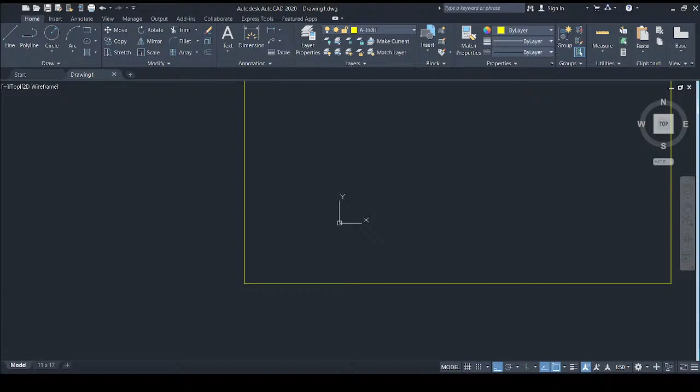As you know, tomorrow the exam will be about 2 hours and something minutes. Whatever, it's probably more than enough time. So if you're a fast person, you'd be able to complete the drawing, and all you have to do once you've completed is basically go through now and spend a bit more time to make your work a bit neater.

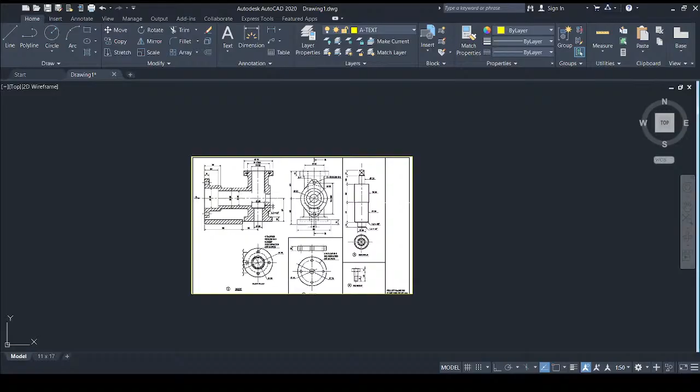So typically they'll ask you to do an end view and a sectional, or they might ask you to do a plan view and a sectional, an assembly. Typically you'll find things laid out like how it is here, where you will have an end view. In this case, this is an end view and this is a sectional view. Here is somewhat of a plan view of the body itself.

Now this plan view is actually showing you what it looks like up here. I hope you can all see my cursor. So that's what that is showing. All the parts will be numbered and labeled. They'll also tell you where the parts should go, to make things a bit easier for you.

So it gets no easier than being a mechanical person doing TD, because you're not trying to figure out anything. All you're doing is reproducing what they give to you and assembling it according to how they say it should go or where it should go.

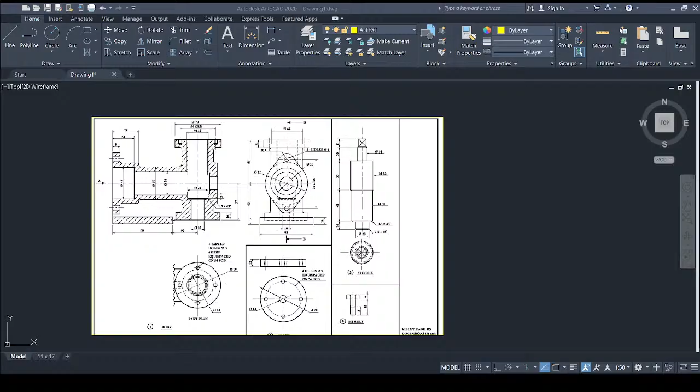So for example, you'll find them telling you exactly - they might say, draw a full size either in first angle or third angle orthographic projection. First and third angle orthographic projection is just a fancy word for how the drawing is organized, for those of you who might not know.

What I'm saying is it's going to tell you first angle or third angle, which one you should be doing. As I said before, first and third angle is just a fancy word for describing how you organize the drawing. So for example, for first angle, all it means is the plan is going to be at the bottom, and then you're going to have the direct elevation or front view at the top, and then you'll have the end view to the side of the elevation. If you're mechanical, you know what I'm talking about.

Nothing major there. As I said before, it gets no easier than being a mechanical student, because the worst case scenario is that you draw all of this and you're unable to assemble it, or you have not assembled it perfectly. You'll still get your marks.

Building person, things are a bit more complicated for you guys, where there are so many variations of things that they could give you. While the mechanical person will know that they're doing a plan view and a sectional view, building persons, you really can't know what they're going to give to you.

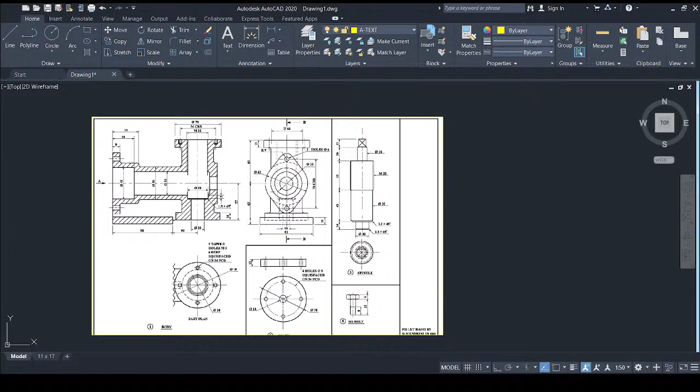Chat is going crazy. All right, so what I'm going to do is a quick layout on my screen for you guys, and I'm going to be doing a quick sectional view of it, a quick foundation plan of it, and just about everything, to give you an insight on how you'll tackle these things.

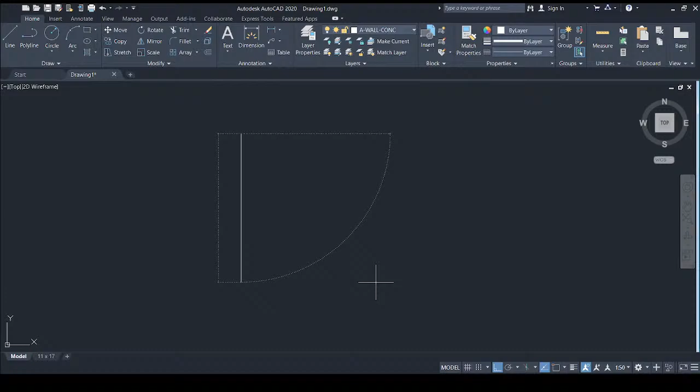So let me go here, A-WALL-CONC. Now I know somebody asked, I think yesterday or this morning, but I was so busy, how do I draw two lines all at the same time? Because some of you, if you're not using AutoCAD architecture, you'll probably draw a wall by simply drawing a line, and then offset it by a certain amount, say 150 or 100 or whatever it may be. This is what you'll do, which takes up a lot of time. But what if you could draw two lines all at once?

Now there's a way to do this, and there's a tool that is called the multi-line tool. Now depending on the version of AutoCAD that you're using, things might vary.

And yes, I'm touching on site plan as well. I'm going to be touching on how you draw the boundaries, and how you draw lines at specific angles and all that stuff. So let's get into things, there are so many things to do. This needed a few sessions. So let's go.

So to draw two lines simultaneously, or to draw two parallel lines at the same time, the tool or command that you use is multi-line.

So whether you want to pull it or find it somewhere up here, I always encourage persons to know the shortcuts. They are your best friend. The shortcuts for AutoCAD are quick access. So even if in the exam all of this up here disappears, you'll still be able to do your work, because you know your commands.

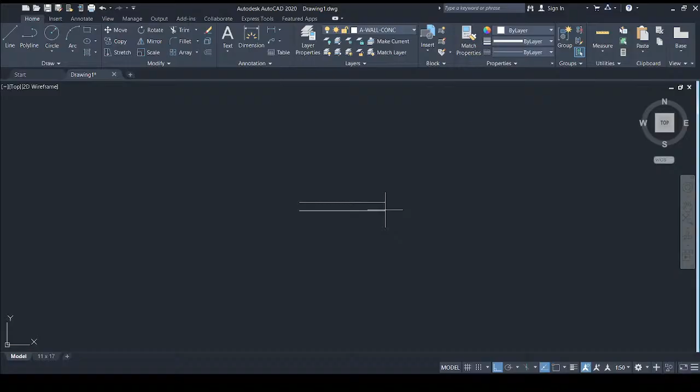So for example here, I'm going to do a quick house, if you want to call it that. As you can see, I'm easily drawing my walls without any issues or problems. I'm simply drawing the walls, but you'll notice the edges of the building changing. So you decide how you want to do your thing.

So I have a little room there and one there. Now you can fillet these as well, or whatever you want to call them. The functions are similar, but you can't use this fillet tool here to fillet the corners, because this here is like a total entity.

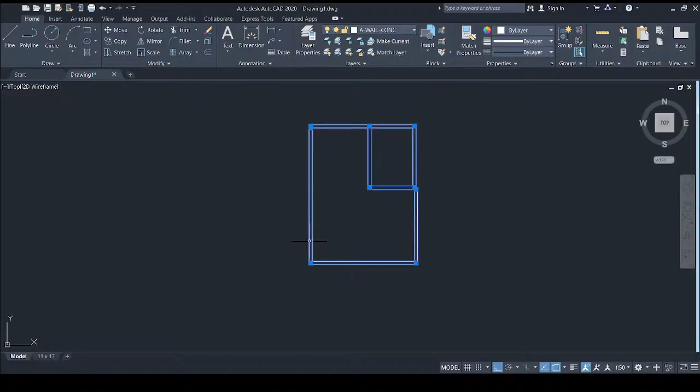This is like a polyline. So if you're going to use this fillet tool to fillet the corners, you'll have to explode these lines. You simply click on them and explode it. Again, the shortcut for explode is X. You'll press enter and then you'll be able to fillet the corners.

The only other option to fillet this type of stuff is basically using the multi-line edit tool. But save yourself the trouble of doing all that and simply explode, then do what you have to do.

Something to note, and because we're here now, this is my simple floor plan. I'm going to do something a bit ridiculous now. So I'm going to go EX, enter, enter, and now grab everything. That should sort things out. Guess not, because this is where we're starting.

All your drawings are starting at this point here. So what I'm going to be doing is explaining the foundation plan, and explaining the roof plan, all from this little layout that I have here. Let me just clean things out. So here I have my little layout.

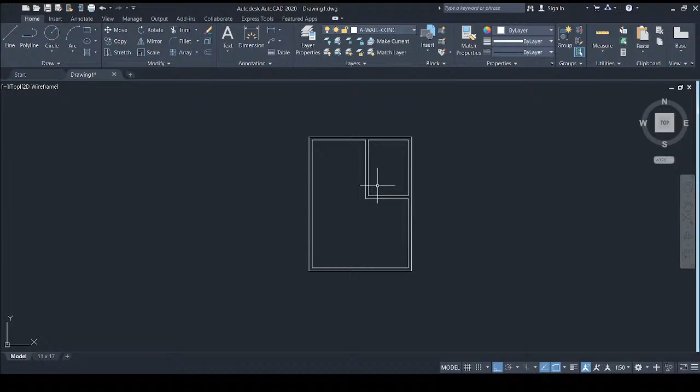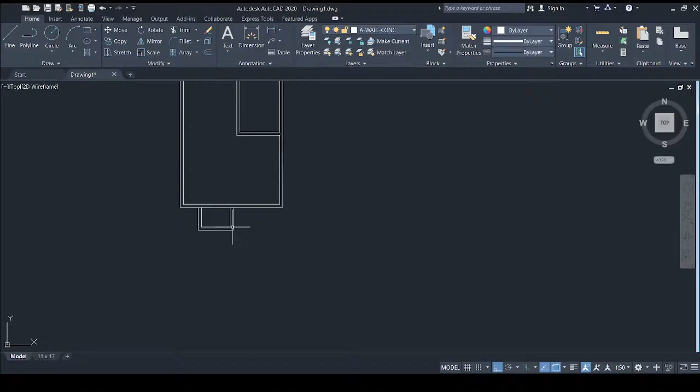Now say for example you have this here. I want you to think about this like you have the paper in front of you. You're given the floor plan and they want you to do a foundation plan or a roof plan. Maybe I should add something to the front here to make things a bit interesting, so when I'm doing the roof plan things are a bit better. Let me just do that then.

Now, my trimming function is a bit different because I'm using AutoCAD 2020. But if you're using the more modern version, you'll realize that when you activate the trim command, it will actually allow you to trim away portion by portion. So you have to be mindful of that.

And please don't worry about the exam. It's not that serious, it's never that serious. Just have fun in the exam, do your work and just draw. Once you get in the exam, just draw, don't worry about anything. Especially the mechanical persons, just draw. Building persons, don't just draw - read the instructions or your goose will be cooked. It's very important that you read the instructions, building persons, because that is how you're going to know what to do. Mechanical persons can just take up the part sheet and start drawing. But you can't, because you don't know - are you doing an elevation, a foundation, or a roof?

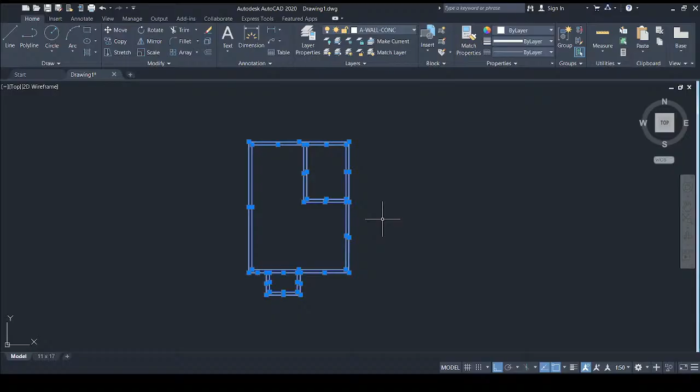So here I have my typical floor plan layout, if you want to call it that. Now here is how you typically do a roof plan. Let me copy this to the side here.

This is how you typically do a roof plan. And this is my technique that I recommend.

So say you have all these lines here, right? And there might be several lines that you actually drew to get to this level here. What I recommend that you do is simply join all the lines together. This will turn all the lines into one complete polyline.

Once it's a polyline, you can easily offset the line that is going to be the overhang of the building, or the part of the roof that hangs over the building. I'm sure you've seen many houses where the roof does not stop against the wall. Or water is going to be running down the wall, so it extends beyond the wall.

Now the dimension for this will vary in the exam if it's given, or you need to produce anything that relates to how far the roof extends beyond the wall. They'll tell you whether it's 450 millimeters, 600 millimeters, or 300 millimeters. Even if they tell you it in meters, you work with whatever they give to you.

In this case, I'm going to be offsetting the outer line by 450. Just an example here. That's not going to work out for me. Let's try 20 because this is just a sketch here.

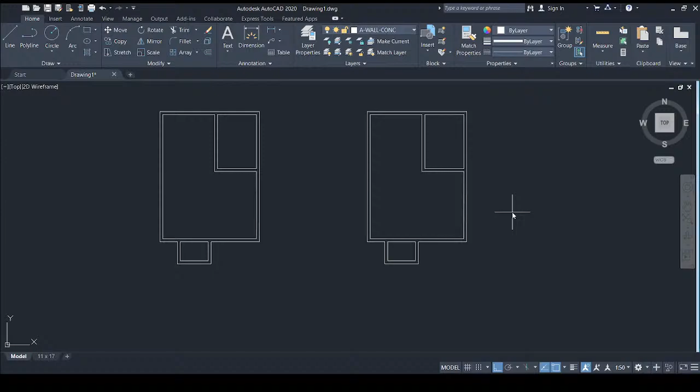Alright, so I'll work with 50, just to be sure. 50. So here I have the general roof outline.

All of this on the inside, no. All of that there. Let me just use this. All of that there is the wall beneath.

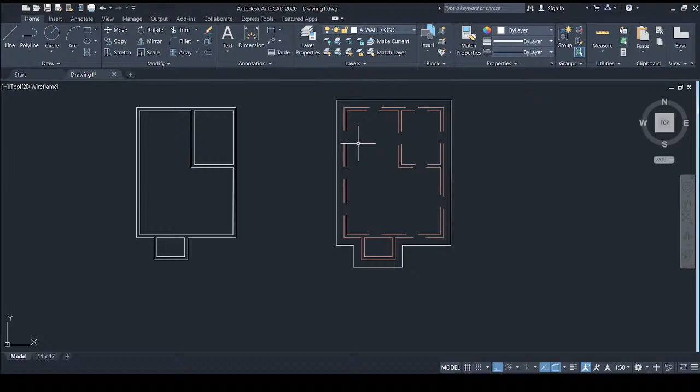Now, how do you draw a roof plan? A typical roof plan, depending on the type of roof, things might vary. If it's a hip roof, then it's going to be more complicated. If it's a shed roof, it's going to be a bit easier. If it's a gable roof, it's going to be easier.

Now, a gable roof is basically just a triangle. It will look like a triangle when you're looking at it from the front, just like this. That's all it will look like. Now, what you'll see from a plan view perspective, looking down at it, you'll see the peak and the two sides. That's all you see.

So in a case like this, what you'll see is one line running down the middle like this. That's what you'll see for a gable roof. One line, and then you'll have the rafters coming off the side like this, a bunch of lines going across. That's all that would be.

Nothing much to that. However, if it's a hip roof, then it's going to require a bit more work. You'll have to draw lines, and I typically tell a person to draw lines at 45 degrees. So for example, everywhere there is a corner on the building, you're going to be drawing a line towards the center of the building.

What am I talking about here? So for example here, you can use dynamic tracking or you can manually enter the angle. If you're going to be using dynamic tracking and polar tracking as well, ensure that this is on. Ensure that the 45-degree angle is selected.

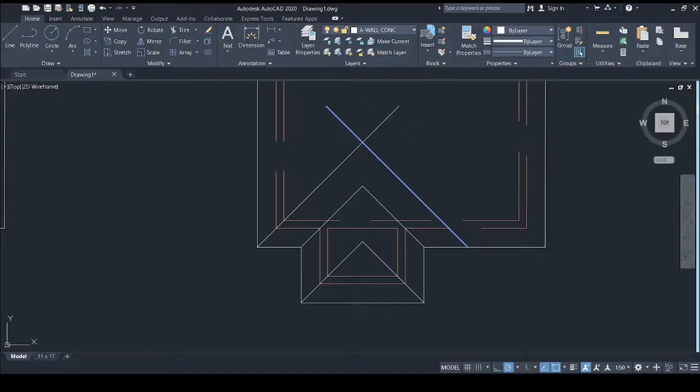So currently you're seeing a bunch of mess here, but there is sanity to this madness. For example, we fillet here and here, and we also fillet here and here. Now you'll realize there is this line here, but realize this is not a corner. Remember, lines must be coming from a corner. All these lines on the roof plan must be coming from a corner, so we put it right here, meaning this will fillet to here.

Now, something to also note: anywhere you have two triangles, whether pointing toward each other or away from each other, there is always a straight line connecting them. For example, we have this apex of this triangle here, and this apex of this triangle here—so that's what it would look like. Over time, you'll develop a better understanding and be able to visualize this without thinking about these specialized rules. Again, whatever is happening down here is happening on the top, so all I'll do is something like that. Now again, apex to apex, we connect them with a single line.

And that's it. The only thing needed now is to add the rafters and label them if you get this in the exam.

Now, foundation plans are a bit different. Let me check my comments—do a section and elevation. I'm going to touch on that as soon as I've finished the foundation plan. Yes, I'm going on that next. Don't worry, I'm going to go through all the comments so I can see how much I can help you guys. So that's the roof plan—you just draw the lines for the rafters, a bunch of them, at whatever spacing they're at.

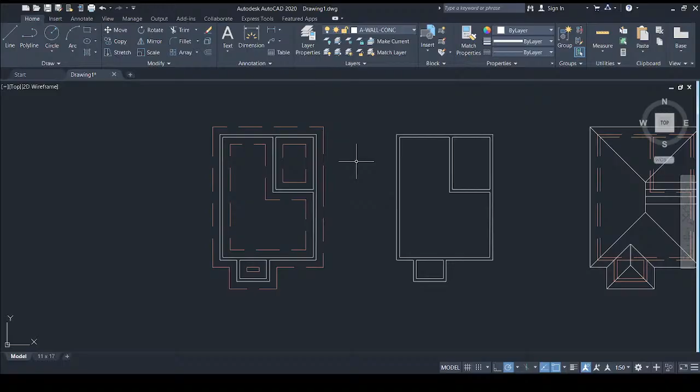Why is it a hidden feature? Remember, the foundation is underneath the ground. You would not be able to see it. So if it's underneath the ground, it means you can't see it. And how do you represent things when you can't see them? You put them in hidden detail. Mechanical person would know exactly what I'm talking about. Building person, you should as well.

Alright, cool. So I'm going to touch on a simple elevation now, of what we have here. And then after I'll do a section and then I'll do a site plan.

Now this is just to reinforce what you should have already known. I'm guessing you have been practicing over the holiday break, going on study leave and all that stuff. For example, think about a door being here, and I'm going to say, alright, well, I guess I don't need to add those. Now, typically you'll be given your floor plan, right? You would not have it like this.

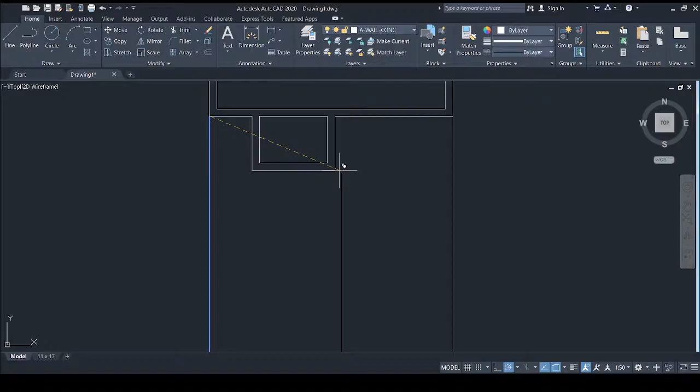So maybe when you were doing your exam, your SBA, you were projecting lines down like this. Now, for CXC, you would not be able to do this. As a matter of fact, you would be wasting your time if you did something like this. Meaning that you drew the floor plan and say you're going to draw the elevation from it. No, you're wasting your time.

Why? Because they're not going to be giving you any grades for drawing the floor plan. I asked you to do an elevation, not a floor plan. So why would you draw the floor plan? You're wasting time there. So you would not be doing things like this.

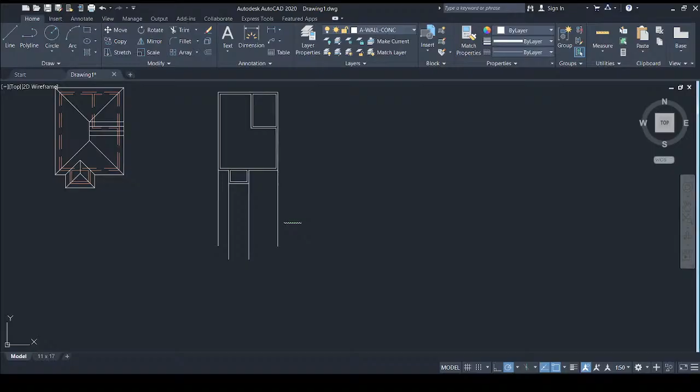So when we are marking your exam, May, June, July. In July, when we're marking your exam, if we see this, I mean, it's up to our judgment, but we did not ask you to do this. All right, what are you being asked to do? All you're going to be doing is picking up the measurement.

Now, say for example, you have these measurements here. I'm just going to grab some dimensions so I know what to do. So we have 5 feet there. Let's continue. Another 9 there and another there.

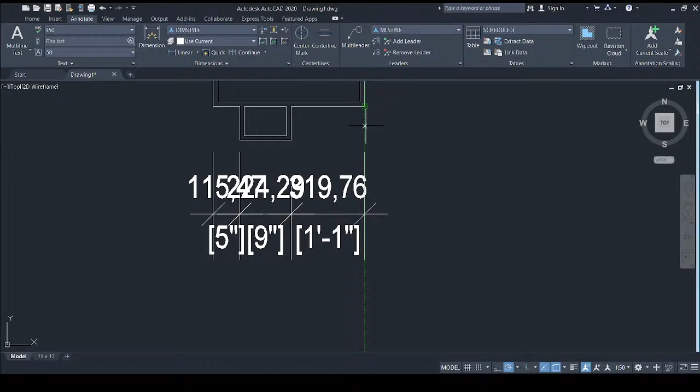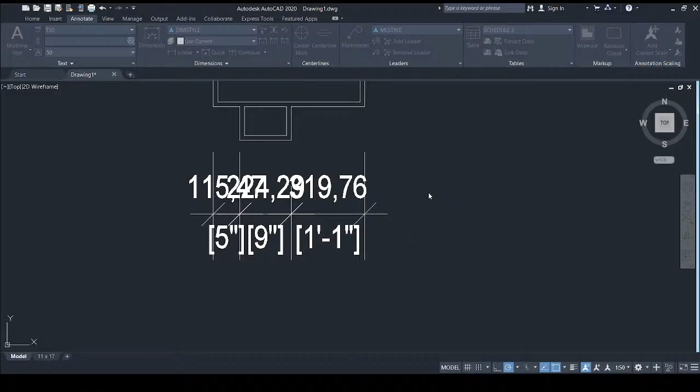So let me just change something, DIM, because my drawing is extremely small here, so things are a bit large. Modify that. Come on, modify. So I can change the text height. Change that to 1. Alright, set current and close that. Alright, let me go take out that as well.

So let me just add my dimensions so I can explain things a bit better. Alright.

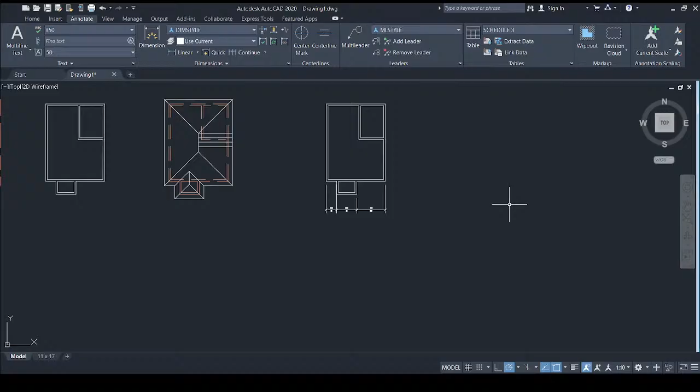Oh, and something you should note again. When you hear them talking about scale and all that stuff, it does not mean you're going to scale up your drawing or scale it down. No, no, no, that's not what you're doing. They're referring to when you're laying out your drawing in layout space. So I'm not going to touch on that now, but let's focus on the elevation.

So if you're going to be doing an elevation or a front elevation of this here, all you're going to be doing is picking up everywhere there's a corner as well. And you hear me talk about corner because corners are what you'll see as the visible edges of the building. So for example, this corner here, this corner here, this corner, this corner. If there was a window inside here as well, the ends of those windows or the doors or the openings will also be a corner.

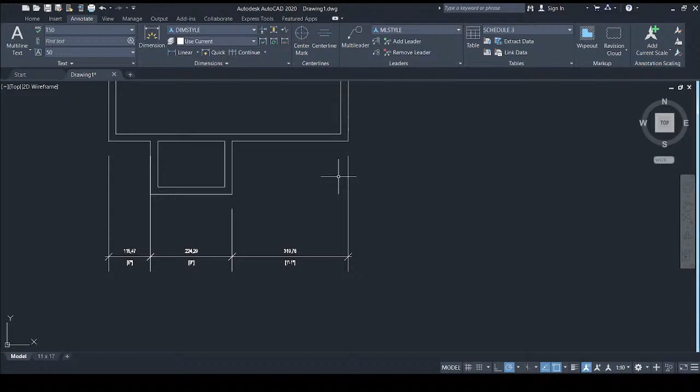Alright, now you'll be working with the dimensions that are given. Typically they don't tell you exactly where the windows and doors are in the exam. You just use your judgment and probably place them in the middle of the wall or wherever, in the vicinity of where it should be. Now, how do you produce your elevation? You're going to do something as simple as this. You're going to start by drawing a vertical line, and you see this vertical line here is where everything is going to start.

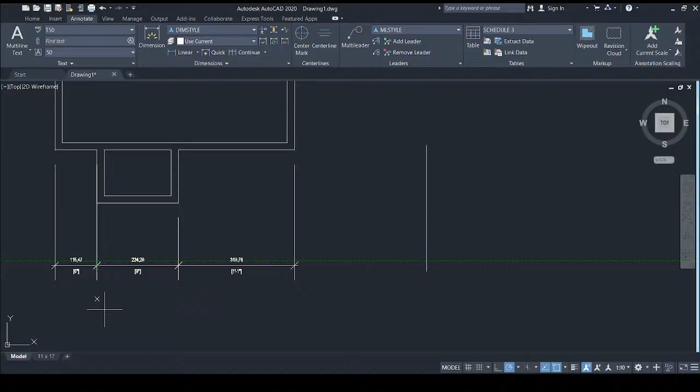All you're going to be doing is offsetting to the right or to the left depending on which side you start from. So for example, this line here is representing this corner here. The next visible edge or corner that we're seeing is right here. And this corner here is 5 feet away from this corner.

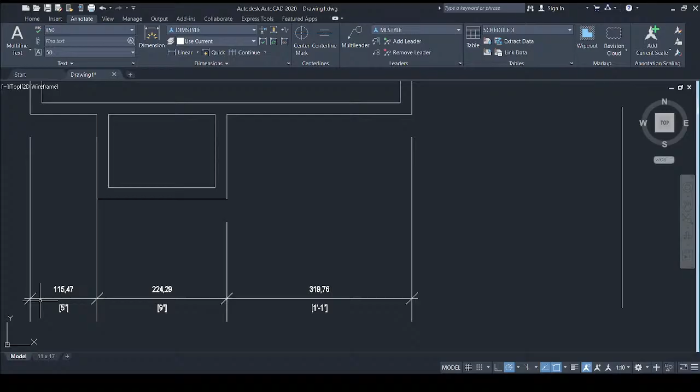So it means that you're going to be offsetting this line here to the right by this number here. So you'll offset it by, I don't even know what that number is, 115.47. So you'll simply offset the line 115.47, and then you'll have that visible edge. Now that will be that visible edge here.

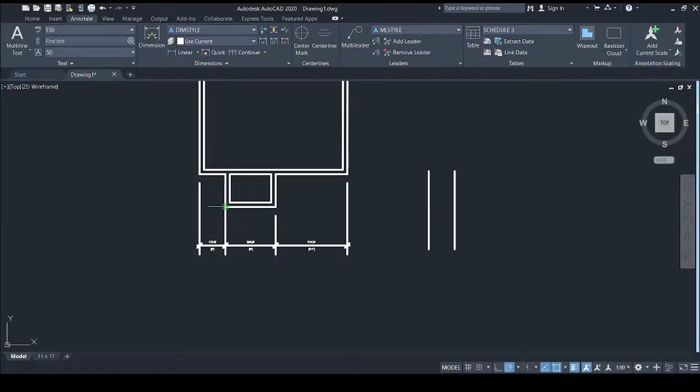Let me turn on my thickening line so you can see a bit better. Now the next visible edge is right here. If you can see my cursor, this is the next visible edge. So it means that we need to find out how far is this away from here. Remember what I said, everything is located somewhere in relation to something else. This corner here is 9 inches away from this corner. Again, this corner here is 9 inches away from this corner. So if we're going to be drawing this corner here on our elevation, we're going to enter

224.29. So we go offset 224.29, and you offset it to the right. Then now there's another visible edge, which is this edge here.

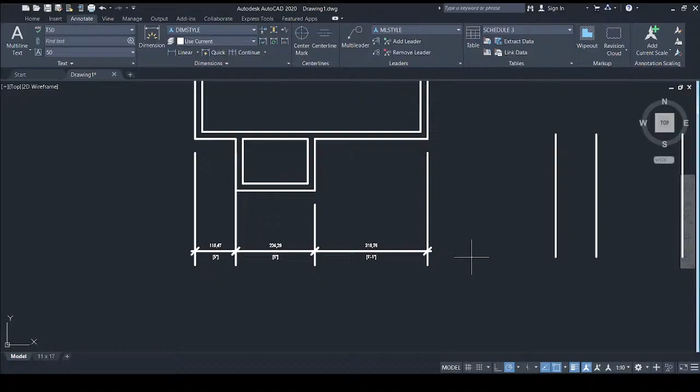How far is this away from here? It is actually whatever this number here is. Oh, you see these numbers are actually inches. So this here is 319.76. So you go ahead and you offset 319.76, and then you will offset the line. So just like that, and elevations are pretty easy when it's like this.

Just like that, you have all the corners or the visible edges. The only thing that you need to represent now is the floor level. You'll have the roof level where the fascia is, and they'll tell you how far away from the ground or the floor the roof is located. So say for example that is it now, right now.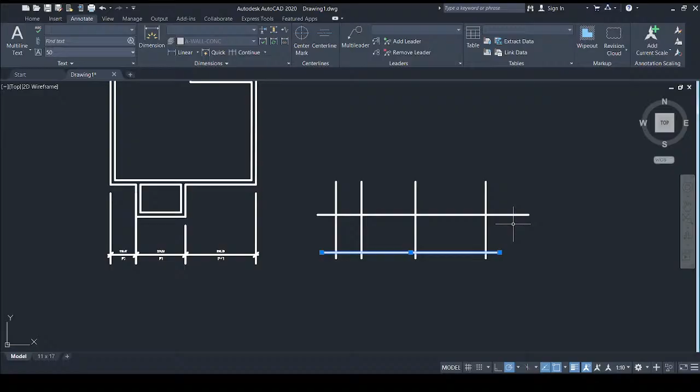All you'll do at this point here is to do some cleaning up. You clean up your drawing. What are you cleaning up? All these extra lines that you have running up below here, you could get rid of them if you like. You could do the same thing up top here, because you know these lower lines aren't going to be passing through the roof. So we have these spots here.

The only thing that you need to do, if there was a window or a door somewhere here, you'll simply just pull it from design center and put it there. So if there was a window somewhere here, you simply place your window there. If there was a door somewhere here, you simply place your door there, whether you're pulling it from design center or wherever you're pulling it from. You'll put your door there.

Now when it comes on to the roof, remember, I want you to remember this. All these lines are visible edges, visible edge, and I'm going to say it is change in depth. When I say change in depth, I mean that they're at different distance apart. So you might be in front of me, or you might be behind me, that's what I'm actually saying. So what this is saying is that either this here is behind this here, this is a bit further back than this, or this is a bit further forward than this. Now, how would you know? You'll utilize your floor plan to know that, okay, this portion here is the part that sticks out.

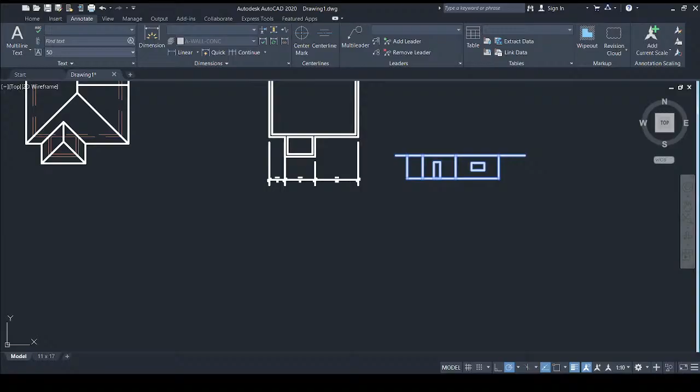Now when it comes on to the roof, especially if it's a hip roof, what I recommend you doing is that you're going to be offsetting to the right, for example, because here we'll have, and you'll see it on the roof here. Let me go over there with this. Let me go over there. Roof, so you can see a bit better. Alright, so here we are. You can see that the roof is some distance away.

Sorry, I got distracted a while ago. From here to here, the roof is hanging off the building by a certain amount. In the exam, they'll tell you this measurement. Here is how you represent it without having to project lines down from a roof plan.

Remember, you don't need to draw the floor plan and all that stuff. All you need to do is offset the roof overhang. For example, whatever they tell you, I'm offsetting here to the right, on this side here to the left. This part that sticks out has a portion that hangs off to the right and off to the left.

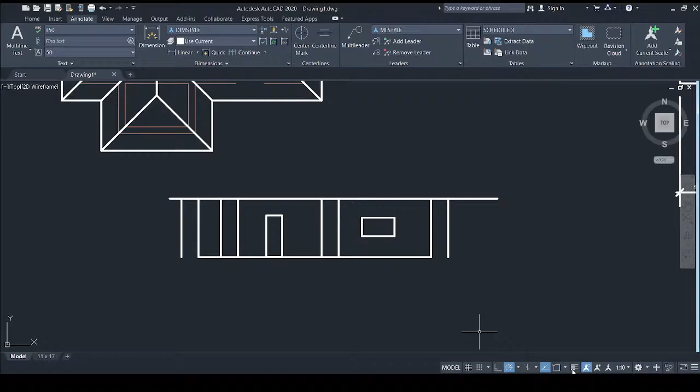It looks a bit crowded now, but once you've started to clean things up, things will look a lot better. Now for example, the fascia - I'm assuming everyone knows what the fascia is. It's that board that runs around the edge of the roof, going around it. That piece of flat board that the roof shows.

How would I describe this? Everybody knows what a fascia is, right? Fascia board - somebody say yes.

Mechanical persons just have to wait your turn, and nobody is cooked. Mechanical persons wait your turn and will be there. In the meantime, practice some past papers. You're not cooked.

So here's what we're going to be doing for the roof or the fascia. In most cases, they'll tell you the fascia size, whether it might be 150 millimeters, 200 millimeters, whatever it is. They'll tell you what that is. Now, say this is your fascia - it means that this portion here is where that part of the roof will stop.

Remember, you're cleaning up as you're going along. So for example, this is that portion of the roof. On this side, it's the same treatment, meaning you're going to be filleting here and here.

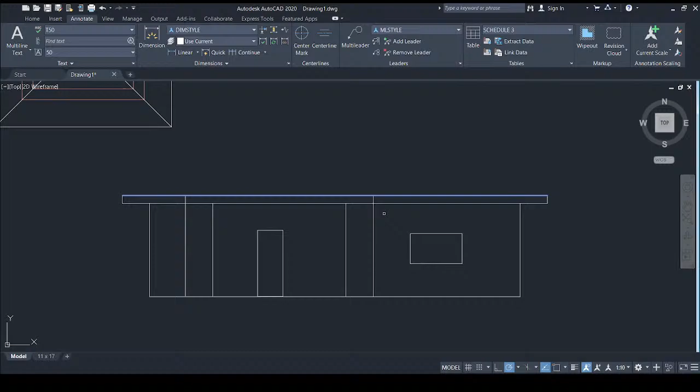So as you can see, we have the two portions that hang over the building. It's the same thing on the middle portion here. All you're going to be doing, instead of trimming and filleting and all that stuff, is extending the lines that you have offsetted. Your technique might be a bit different, where you probably drew a line - it doesn't really matter what technique you use. Just be efficient, as efficient as possible in whatever you're doing.

So as you can see, we have our fascia, and I have the edges, or the visible edge, of the portions of the roof. Now if you have seen my video on how to do roof elevation, then you pretty much know what is going to happen here.

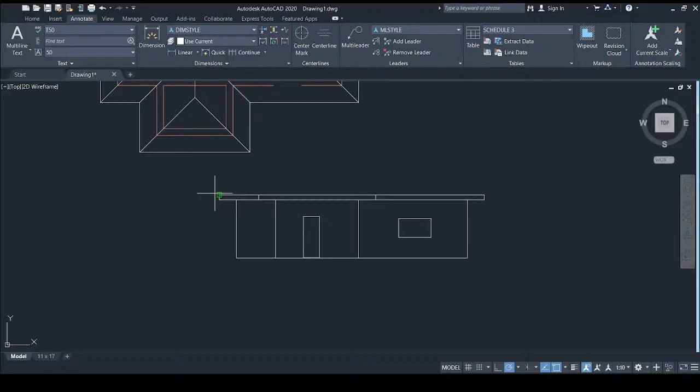I'm going to be drawing lines at an angle of 30 degrees, but this 30 degrees is not set in stone, because it could be 45 degrees, it could be 15 degrees, depending on whatever they tell you. Because they might not tell you the angle, but they might tell you what the height of the roof is. In this case, let me just draw a line that is 30 degrees.

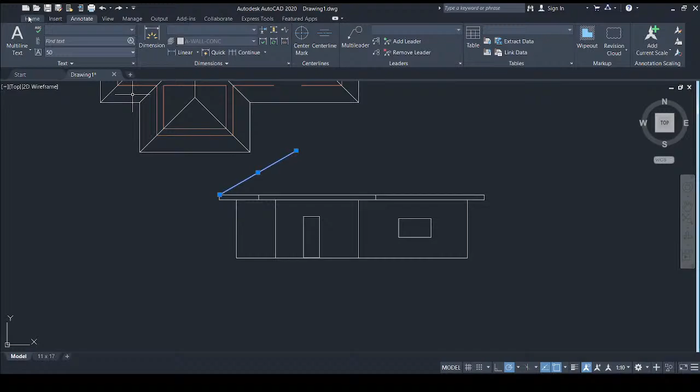Let's use polar tracking, ensure that 30 is selected, or you can manually enter the angle, it doesn't really matter. Once things are symmetrical, you simply mirror to the other side. So for example here, you mirror here. Let me just double check. Like that. And then now you simply connect the apex - and when I say apex, I'm talking about the peak of the roof.

Now for example, this small portion of the roof here - this is why it's important that we have this at the angle. And you'll draw an angle here. Again, here is perfectly symmetrical to here, so all you simply do is mirror to the other side.

In some cases, you might accidentally mirror to the wrong point. Don't be afraid, no reason to erase what you have. Just simply modify, and I always encourage you to do this - you don't ever start over. All you do is modify your drawing and continue. Don't be erasing 30 minutes of work and starting all over. There is no need for that.

So this is what a simple elevation of this roof, as well as the building, will look like - that is it. That is the elevation, and it will be the same treatment if you're doing a side view and all that stuff. Simply offset those lines going to the right or to the left, then you add your roof. For your section, it may vary - and remember, it is always where they cut the building.

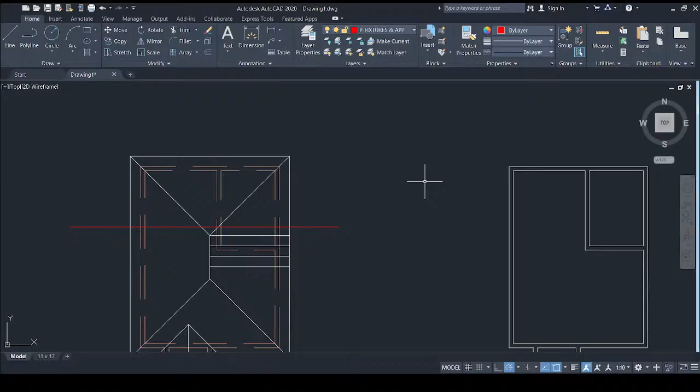All right, so let's see, with the sectional view. All right, so say we're cutting the building here, and again, if they're asking you to do a sectional view, you're not required to draw the floor plan. All you'll be doing is looking at your floor plan as it is, and simply drawing the line. Now, in the floor plan they give you tomorrow, it's going to be a single line, you're not going to be seeing double lines. All you'll have to do is simply offset the thickness of the wall based on the specification on the sheet. So they say the wall is 150 or 100 or whatever.

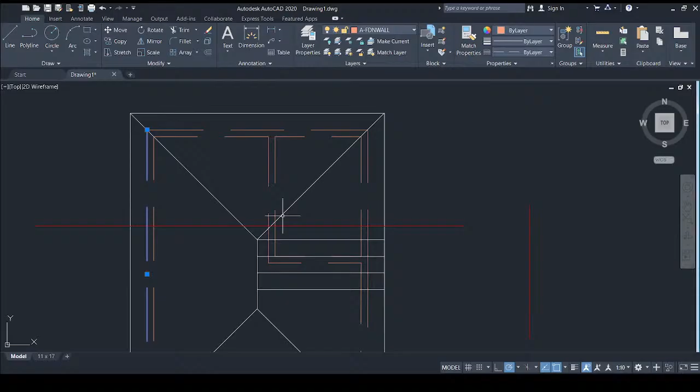If you're doing a sectional view, once you have drawn the first vertical line, for example, I would be drawing a line now. The line that I'm drawing, let me just explode all of this here so you can see. So the first line that I drew is actually representing that line, because the sectional view cut through this line here, cut through the entire thing, but it passed through this wall here. Now a wall is not a single line, it is two lines, so we have to offset whatever the thickness of the wall is, whether it's 100, 50, or 150, it doesn't really matter, just offset the lines to represent the wall.

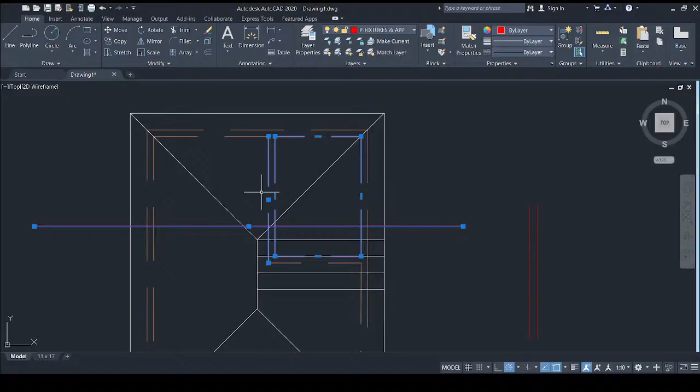Now again, the next part would be this wall, because this is where the section line passed through next, pass through that wall. But how far is this wall here away from here? Now you'll see this from the dimensions, and all you'll do is simply offset the lines over even further. By the time you have done all that, you'll have lines representing the three walls that this section line passed through.

And then everything from here is the same elevation, where you simply draw the floor level, you'll draw the roof level. However, the only difference is that for the elevation, you'll be seeing the outside of the building only, such as the roof, the walls, the fancy windows from the outside. But when you're doing the sectional view now, you're seeing inside the building. You are seeing inside the building.

So if there is a kitchen in the back here, you'll see the kitchen. If there is a bed around the back here, you'll probably see that. If there is a window there, you'll see it. The only way you would not see a window or a bed inside this room is if your cutting plane was here. If your cutting plane is here, it means that when you're looking up towards this area, it's an open area, so you would be able to see whatever is around here. But when you look on this side, all your eyes will be greeted by is a wall. If there's a door in this wall, you'll see it in the background, so you'll have to represent that, but if it's just a blank wall, then there will be nothing, it will just be a wall.

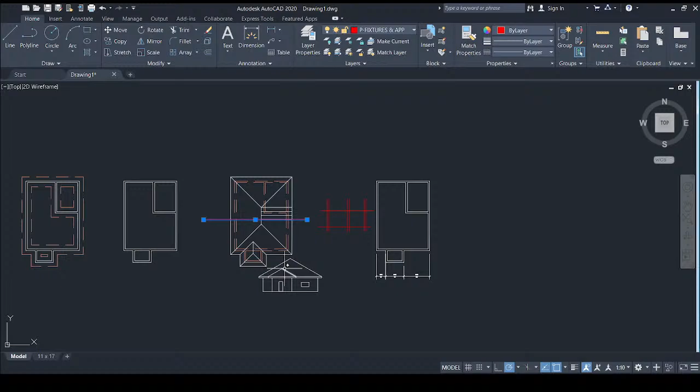That's the only thing you need to know when it comes down to sectional view. It's the same exact way as how you'll do an elevation drawing. The only thing is that you're now seeing inside the building. But it's the same way you do the windows, the doors, the roof. Nothing changed. You're just adding a bit more information or details to the drawing.

Down below the wall here, you're going to have the foundation footing detail. Up top where the roof is, you'll have the eave detail. Probably in the middle somewhere you'll have the ridge detail, and then you'll have probably windows in the back. Can you visualize what is going on here?

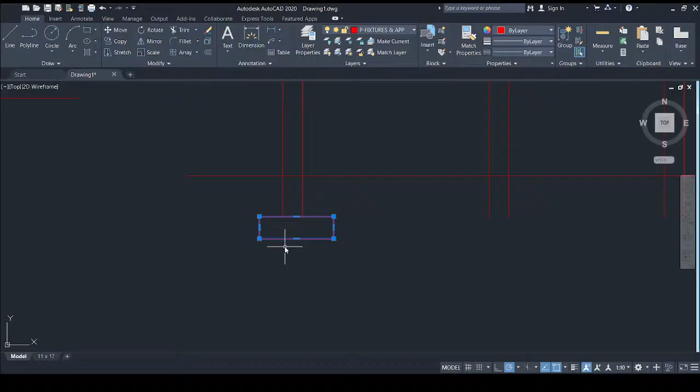Let me show you something. So this here would be say your foundation pad. I hope this looks familiar to you. I'm sketching this out for you. That's basically what things will look like.

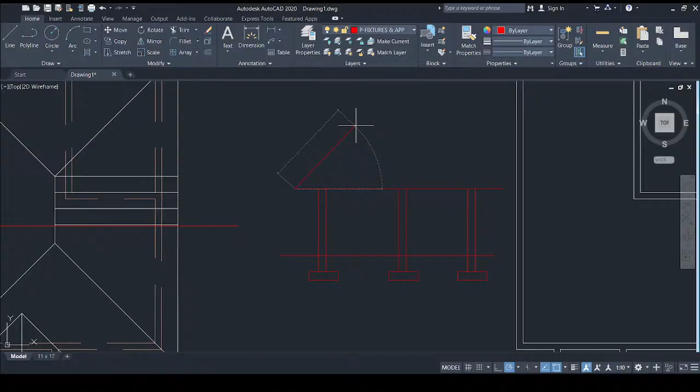Then you're going to have the roof up top. What will the roof look like? It's going to look somewhat like a triangle. Now inside of this triangle, you're going to have the rafters. The rafters are coming down like that.

Again, this is an overly simplified elevation, but it's just to explain how you position the wall, and that's where persons tend to fall down, somewhat in the roof. But it's nothing too complex. Again, building persons, please read the information or read the question. This is how you're going to know what to do.

The first thing you're going to do is look at the floor plan, and you can say, alright, it doesn't look bad, let's see what we have to do. Then you read the instruction and find out they say do an elevation, or they might say complete the floor plan. If they say complete the floor plan, then you're good - just reproduce it, complete it, ensure the walls have thickness. Put the furnitures, only the ones they ask you for. Don't waste your time doing things that they don't ask you for.

So as you can see here, we managed to do a quick layout. We touched on the multi-line tool and how it operates. We did a quick foundation plan, a quick roof plan, a quick elevation, and a quick sectional view, explaining what is going on. Remember, using AutoCAD things can take a bit more time, especially when it comes down to sketching things. As you can see, we're already there - we're just like probably an hour in.

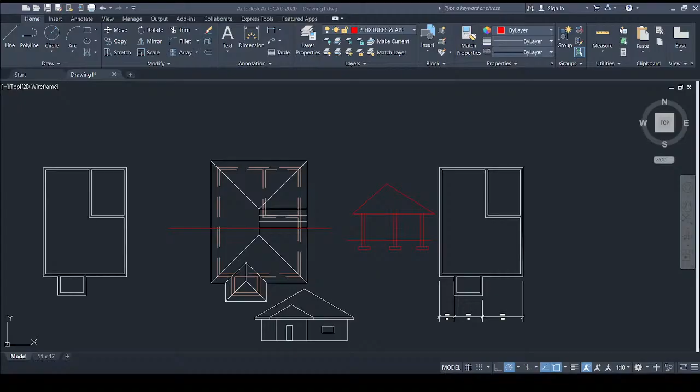Now in the exam they'll tell you how far down the bottom of the foundation is going. They'll tell you these things - everything will be on the paper. So they'll tell you the depth of the foundation if it's a case like that. They'll tell you how fat these pads should be if they're asking for something like that. They'll tell you everything, the size of what everything should be, the thickness of the wall.

They'll tell you the height of the roof, the fascia, the windows - they'll tell you everything. All you're doing is just drawing what they give to you. So if they have to draw a window, you just draw some rectangle according to the measurements given. You just draw that.

So here we go, site plan, site plan. Now they will give you - I think I have a video on the channel on that.

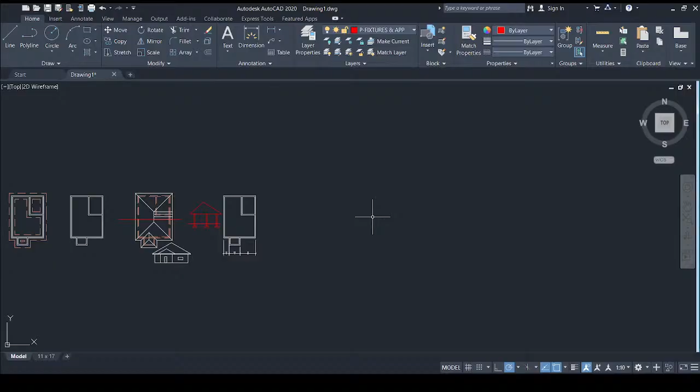Now typically, a site plan will show the relationship between the different components on the site. When I say site, I'm meaning the property. Think about the site being your house. The fence around your house is the boundary. On this site, you're going to see where, for example, the house is.

You're going to see where the driveway is. It's going to show you if maybe you have a gazebo on the property, a pool - where it is, and how far it is away from the building. It's going to show you the guardhouse, where the gate is. If you have a mango tree around the back in a corner that you raid every evening, it's going to show you that too. All of that you'll find on your site plan. Also, in some cases, you might find drainage.

When it comes on to sketches, I don't know where we got this from, doing sketches in AutoCAD, but sketches are typically freehand and done on paper. Sketching can be time consuming to do in AutoCAD, especially given exam conditions and limited time. As you know, typically they say 30 minutes for the sketch and design portion, so that can take time. If you're not pretty quick, you can lose a bunch of time there.

But it can be done, it can be done in terms of sketching in AutoCAD. What's going to happen is that you're going to want to make things as accurate as possible in AutoCAD when it doesn't need to be accurate in terms of measurement because it's a sketch. So that's the drawback when it comes to sketching in AutoCAD.

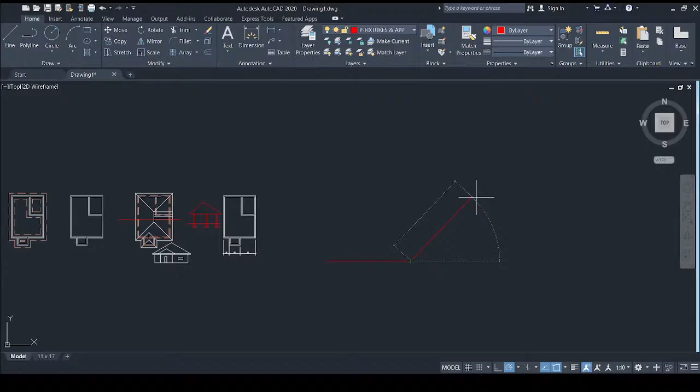Now you could find it using your dynamic tracking thing and cooking your way around, but the moment you click, something is going to be off. So I always encourage persons to manually enter these angles.

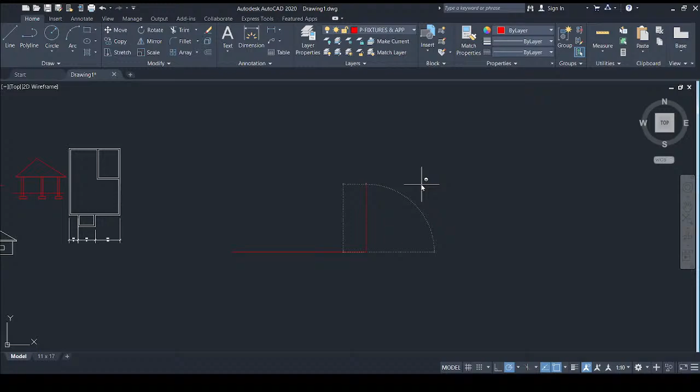Now typically, persons have different strategies for entering the angle. This is how I was taught to enter the angles: I was told to hold on the shift key and select the less than symbol. Once I select the less than symbol, I enter the angle that I want, in this case 26 degrees, and press enter.

What that does is lock your cursor onto that axis of the angle that you entered. So it doesn't matter where you move your cursor, it's going to stick to that angle. And the only thing left for you to enter next is the distance of the line.

So for example, if they say it's 100, 1000, whatever, you enter the angle, then now you draw the other line. Now you might see that it might come this way by a certain amount. How are you going to enter this angle?

Now typically, AutoCAD records angle in an anti-clockwise direction or clockwise direction, depending on how you want to think about it. This is just a workaround that I've come up with, or found, because you might not want to calculate what's the angle from here, since this might be 90 degrees.

This is 45. All right, so it starts here. This is 0, 45, 78, whatever, whatever, whatever. But the angle that they might give you would be from here to here, and you might not know the angle between there.

So what I typically do is, because if you think about all lines, from here to here is 180, right? And it comes around, so from here to here is 180, and then there's another 180 coming around underneath here.

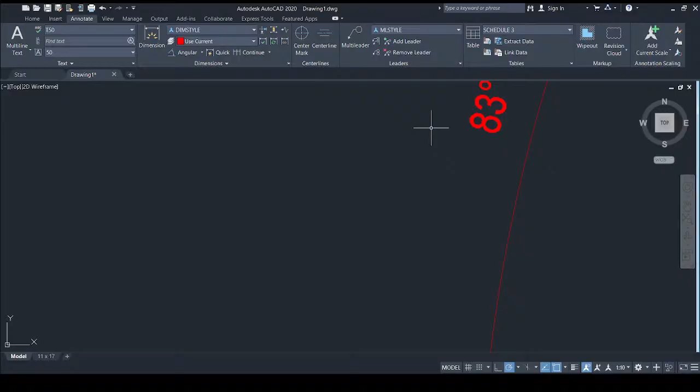So all I'll do is continue to rotate this line. I'll probably rotate this line by the difference to get it to the 75. So I'll rotate it. How am I going to rotate it? I'll simply enter the angle.

So if it is at 83 and I need it to be at 75, it means that how much is that? 8. So I'll simply add 8 to my rotation angle, and I'll get the measurement.

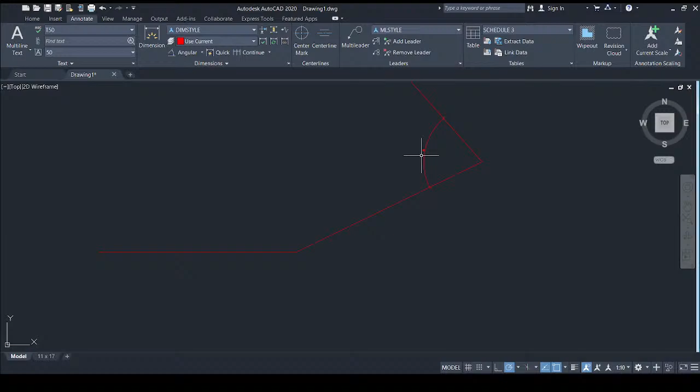Now, in some cases, let me just enter 8 and see what happens here. All right, so when I enter the 8, as you can see, it adjusted itself. So now it's at the angle that it's supposed to be.

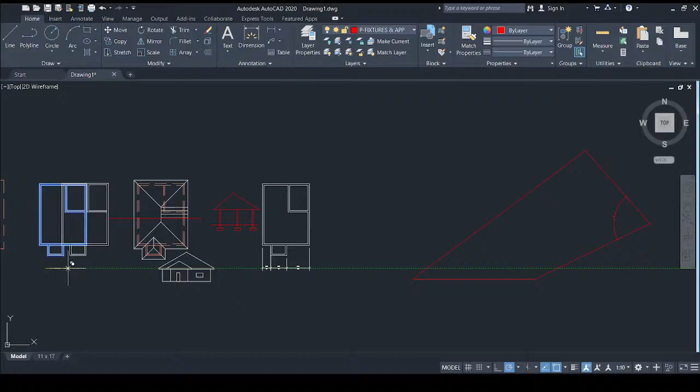And then now you'll finish the process off by continuing based on the angles that they gave you for the property boundary. Once it is there, you simply grab onto your building that you have, and in cases like this, you'll have to draw the floor plan and place it on the property, based on the specification that they give you, because they'll tell you where the building should be on the property. You just have to read the instruction and find out where you're placing your building.

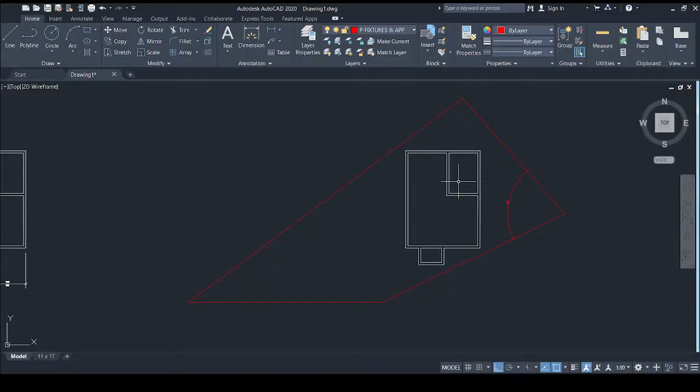So that is how you pretty much would do that. You know to do the floor plan already, drawing the angles for the boundary, and you should be good.

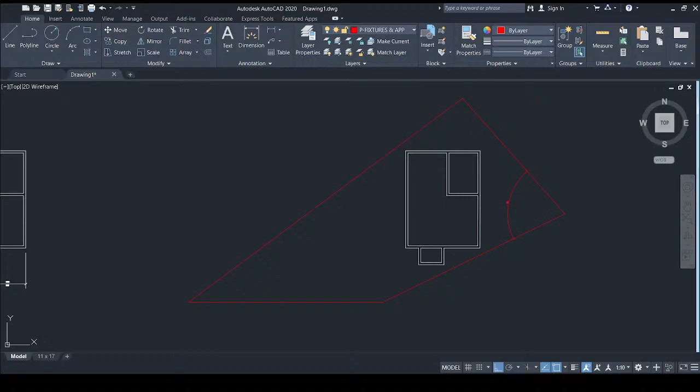This site plan, I think, let's do - so this would be your typical site plan. Again, something you should always remember to put your title for everything and the scale. There is a mark allotted to that. I always do it, I will simply say you can use a text tool.

Now some people will go fancy and use the title from the tool palette, but you don't need to go all out like that. Just simply use your text tool, or if you want, use the multi-line tool, and you simply enter what it is.

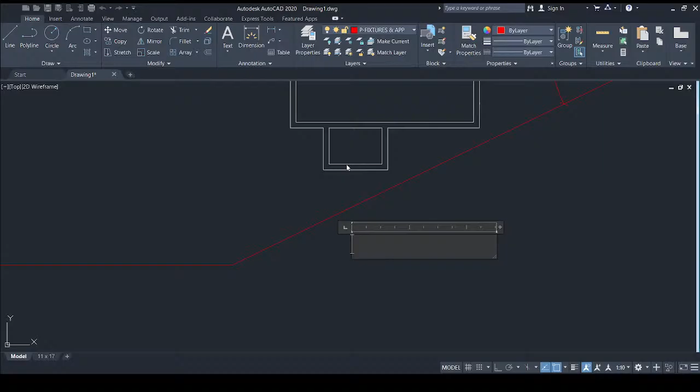So for example, you would just simply type site plan or whatever it is. So say for example, this is our site plan. I write site plan. Is it typing? Is it typing?

You simply type 'site plan' at the bottom here, and then you'll write the scale underneath it. Say if they say the scale should be 1 in 50 or 1 in 100, you just type that below it. Just type the word, you can't go wrong.

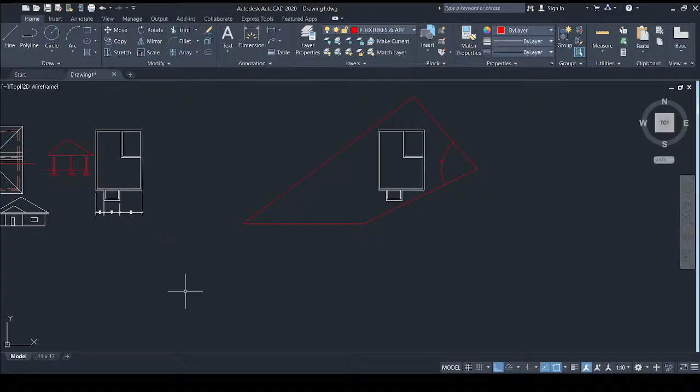When it comes to laying out your drawing, I've noticed that some teachers might teach students to draw a box around the drawing like this, and some might tell you to scale the drawing, making it smaller or bigger.

Don't do that, because when you do things like that, if you need to go back and make adjustments, it means your drawing has been messed up. You've changed the measurement when you scale it down — you've turned something that was 50 into 20, so it's no longer 50. How are you going to modify things?

There's a reason why AutoCAD is so expensive, almost 2K a year, 2,000 US dollars per year — it means they've thought about everything. When you're laying out your drawing to scale for printing, for the PDF so school can print it, come down to here where you see layout.

Typically, it will look like this on your computer. You'll see Layout 1 and Layout 2, where you'll have your layout.

Now, I have my title block all set up here. I made this old template a long time ago. If you want to access title blocks in your AutoCAD, you see this plus button here — simply right click on it and select 'from template'. Once you click that, you'll be greeted by a window that pops up.

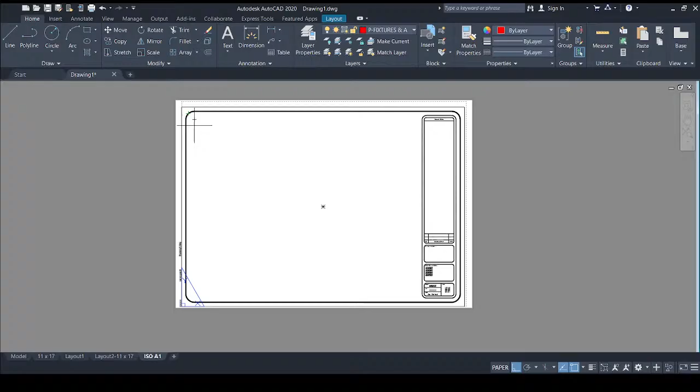So what I'll do, once I've selected viewport, you realize that it has activated my cursor, similar to when you're trying to draw something. So all you need to do is draw a rectangle within the boundaries here like this. Once you have done so, you're going to see your drawing. All you need to do is double tap inside here, zoom in around the drawing that you want.

Now in some cases you'll have to set the scale. Mine is going to be off now because things are a bit whacked, most of this is sketched. But you'll simply go to this drop down menu and select whether it might be 1 in 10, 1 in 20, 1 in 30, or 1 in 50. AutoCAD will automatically adjust your drawing to that scale, so when somebody comes and measures it, they'll be able to accurately determine what the measurement will be in real life, even if there is no measurement on here.

Alright, once you have positioned your drawing, simply double tap on the outside and your drawing is all good. Everything will be nice, and all you have to do is create your PDF.

Now I know for some schools they create the PDF for you, but if not, CXC wants the hard copy. Yes, the drawing files are uploaded to the portal as well, but the hard copies are what us as markers are going to be looking at to mark your grade. It has to be something serious for us to be looking at your soft copy. Alright, so this is what your layout will look like.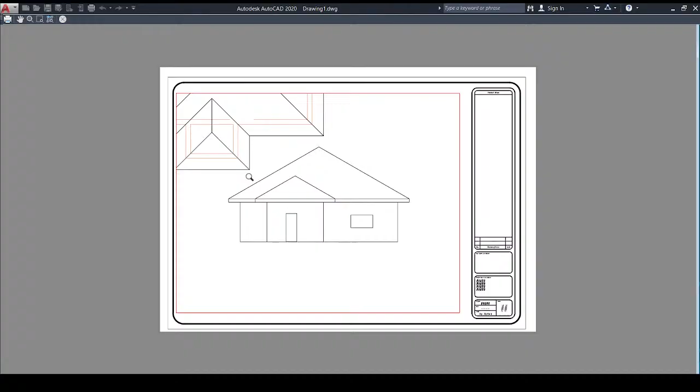Please remember to write your name and all that stuff. Create your PDF, save it on the flash drive or on the computer, wherever you're doing it. Your school will do the rest. The school will print it for the CXC and all that stuff.

Alright, so that is you there.

You lost? I was touching on how to lay out your drawing. I'm assuming you don't know how to lay out your drawing. Well, you don't need to worry about that, because if things are that bad, your school will lay out the drawing for you, or your teacher, or somebody there, so that they can print the drawing to send to CXC for you, to ensure that you pass.

Alright, so I'm just going to run through layout one more time, how to lay out a drawing. But your focus right now should be on how to do your drawing, because that's where you're going to be getting the bulk of the mark.

So where you have layout 1, layout 2, and layout 3, or the one at the bottom, just right click on the plus button, select from template, and from there you could go to sheet set. Please bear in mind that there's so many things that you could do, because you can set up the paper size and all that stuff. This is just a quick run on what to do.

Once you click on sheet set, click on any one of these here. The option is yours. Mechanical person, you can choose manufacturing. Building person, you could choose civil or architectural. I prefer, or I would say, choose metric, or one that says metric, and then you just click OK.

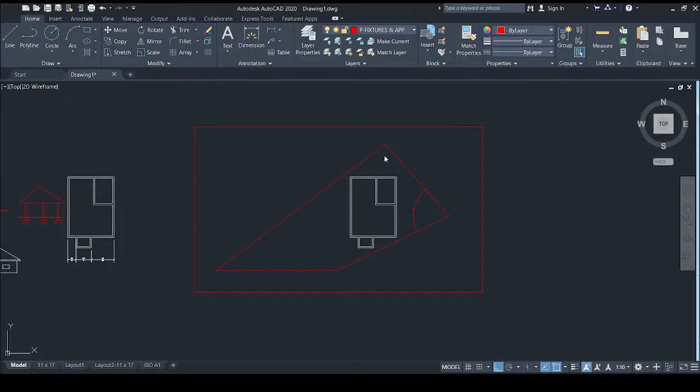And you'll see this window pop up. Just click on whatever is inside there. Okay, yes, the process is long, sorry, but this is just something that you have to know. But as I said, if this is not done, then your teacher would sort this out for you to ensure that the work can be printed and sent off to CXC in the afternoon.

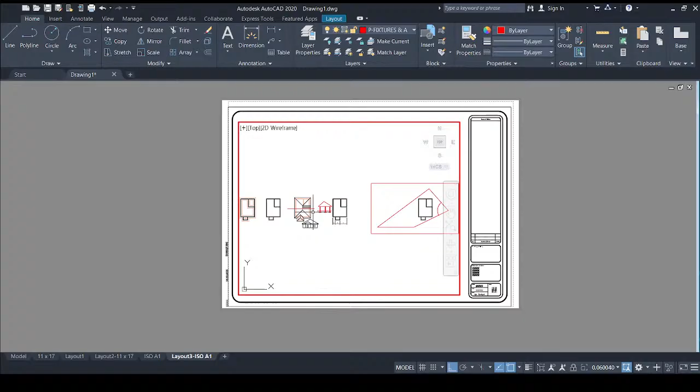Once you get to this point, type Vport. This will allow you to change this from a blank paper to something that will allow you to see into AutoCAD, or the model space, where you can simply zoom in on your drawing or set the scale, and then you double tap on the outside and you'll be good. But don't worry about this too much. Focus on how to do the drawing.

Sir, section B, prediction, what, for building? I have no idea what's coming on that. No idea. So if you're a TD student and you do building technology, you should be fine. You should be fine.

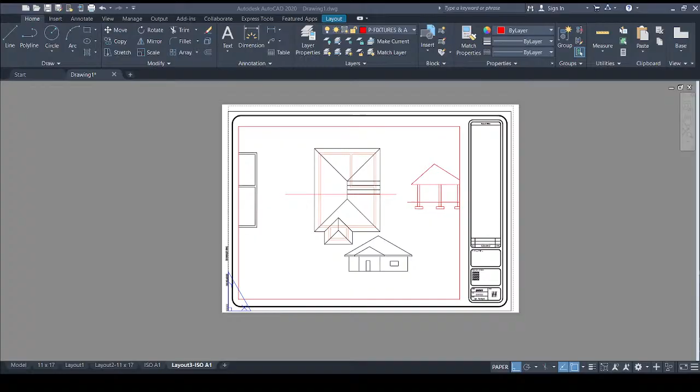No, it won't be wrong if a mechanical person chooses an architectural sheet. It won't make a difference, alright? Because you could use a simple layout that is done in AutoCAD as well now, for both mechanical and building persons. You see the one that says Layout1, you can do it there. All you need to do is change the paper size.

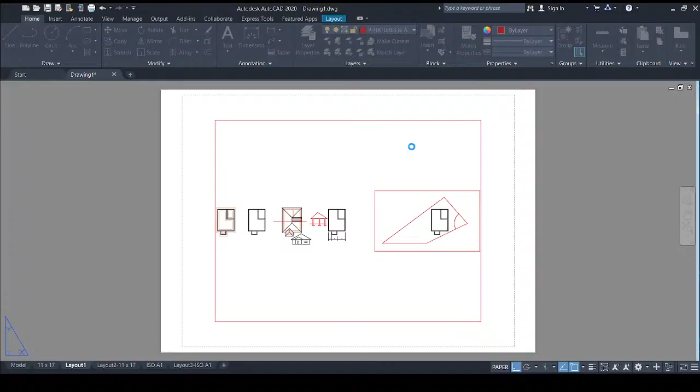How do you change the paper size? All you need to do is right click on it and select page setup manager, and you change the paper size to 11 by 17. That's all. Once you change the paper size to 11 by 17, click on set current, and you realize that the page has adjusted. And all you do is open up this little window that is here.

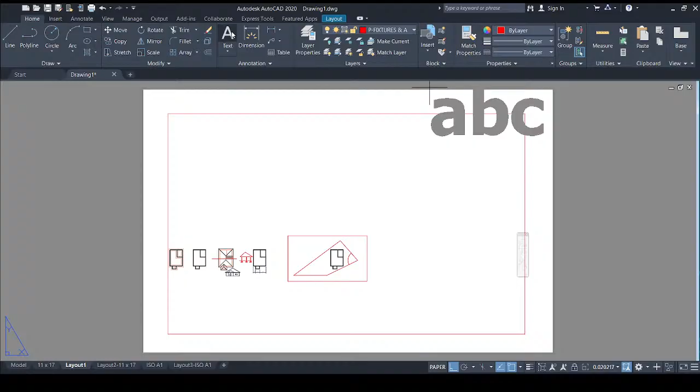And remember to add your name as well. You can add your name here again, same exact principle as how you'll add your name in AutoCAD. You just use the text tool here, and then you type your name wherever you want to type it. So you type your name and candidate number. If things are too big again, you can always change the font size.

Font size is changed just like in Microsoft Word. You'll go over here, click on this, and then change that from 50 if it has 50, maybe put it at a smaller number. You could fill things out if you want as well. And then you set that up. But that's nothing major, alright, so I'm moving from there now.

Where are my mechanical persons?

No, you can do it after. After you close the viewport, you can write your name.

Oh, how to set up your units? Now, if you're given extra time to set up your units, alright, so here's how you set up your units. Now, mechanical and building persons, your unit is going to be set up the same exact way. So here's how you would set up yours. Now, typically, maybe you would have selected one of these here that says, um,

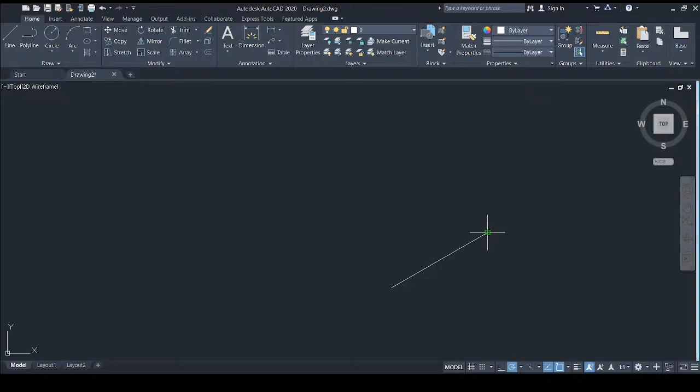I don't recommend it. Persons use this, but remember what I say. Sometimes you might be drawing the line, and you see the green line, but when you click, it didn't snap to that 30 degrees. So when you start drawing things around, you realize that after a while it's as if things aren't falling where they're supposed to be. Why? Because at some point during the process, you didn't draw one of the lines at 30 degrees, or on the 30 degree axis that's supposed to be there. That's why I encourage persons, if you're doing it, two things you need to do: ensure that ortho mode is turned on, and ensure ISO plane is turned on. And you toggle between all the different planes, the ISO left, ISO top, and ISO right. So for example, if you're, and I'm just going to use a simple example,

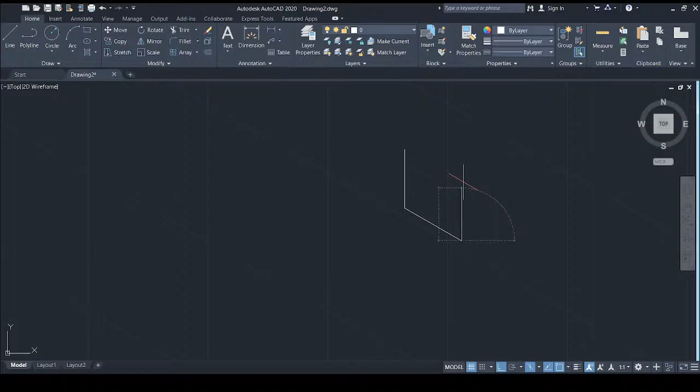Drawing a rectangle or a square, whatever it is. All right, drawing a rectangle or a square.

As you can see, I was currently on ISO left, and my cursor can only move from right to left. If I select ISO right, you can use the F5 key to toggle between them. ISO right allows my cursor to move from left to right. So ISO left, cursor moves right to left; ISO right, cursor moves left to right.

In this case, instead of moving left to right, I won't be able to do that because I have ortho turned on. Ortho restricts my cursor to only draw on the vertical and horizontal axis of whatever I'm drawing on. So I'll only be able to draw a line running this way and up. For example, I can draw a line up and across like that. This is how it can be done, or should be done, pretty easily.

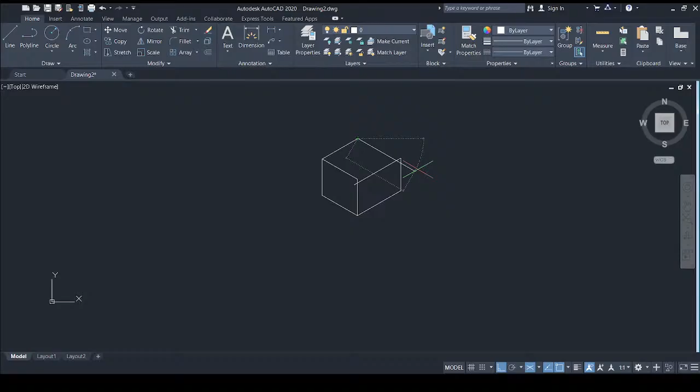Now when it comes to the top portion, you could use ISO left and right to draw it as well, but there's a function known as ISO top that allows you to draw it as an iso top, if you want to call it that. So you'll be able to draw the top portion like that. This is a sketch, and I'm not trying to make it accurate, but this is just to explain what is going on with the ISO.

If you're going to be drawing circles, you don't use the circle command for isometric drawing. You're going to be using the ellipse tool. I don't know what happened with AutoCAD, but to draw an elliptical circle in ISO mode, you have to select the ellipse tool, then come back and select the ellipse tool again, whichever way you select it. It's on the second selection that you're able to draw the isometric circle. First you select iso circle, then you'll be able to draw it. So activate the ellipse command, activate it again, select iso circle, then draw your isometric circle, ensuring your base point is where it's supposed to be and all that stuff.

So that's that there. Again, gents, ladies, if you're here, I suggest you guys try to get some rest. You want to practice in the morning when you get to school, you can exercise those mouse fingers of yours for when the exam starts.

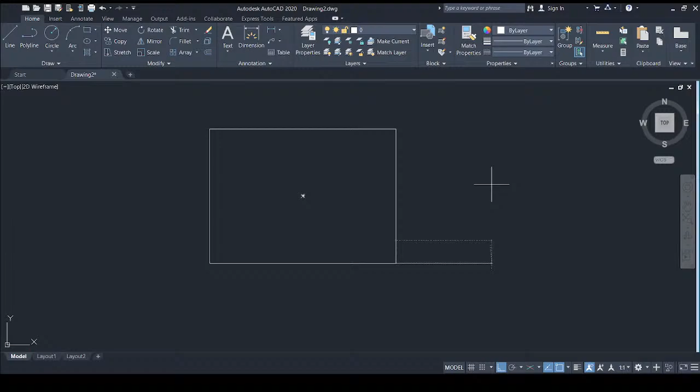That's the reason why they call it the oblique direction. Typically I draw mine at 45 degrees, that's my oblique angle that I'll use. It could also be 30 degrees, whatever, that's the oblique angle. So say 45, the receding axis is at a 45-degree angle, or at an oblique angle. So this is what your typical oblique drawing will look like.

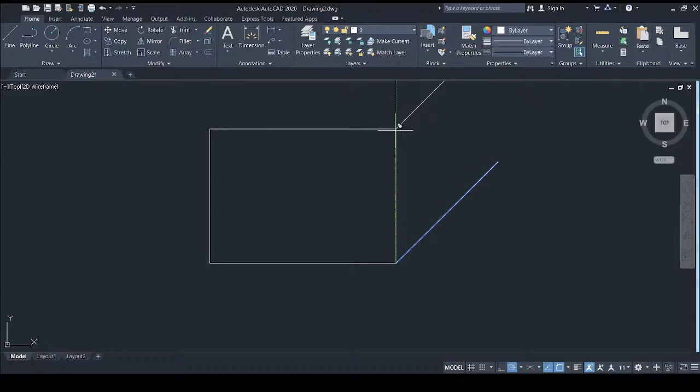In relation to it, you'll probably do this for your SBA already. Now remember there are two types of oblique drawing: cabinet and cavalier. Cavalier is when you draw the object based on the actual measurement.

So for example, if the measurement from back to front is 5, when drawing it as an oblique drawing, you'll draw the depth as 5. If it's a cabinet oblique drawing, you cut the measurement in half. Only the receding axis gets cut, not the ones on the picture plane facing you. So if the receding axis was 10, for cavalier oblique it stays the same, but for cabinet it becomes 5. Even if the face is 5, you leave the face alone. Only the receding axis, the angled line, is what you change the depth of. That's all.

Alright, and ladies, if you're here, head out, head out, head out, head out.